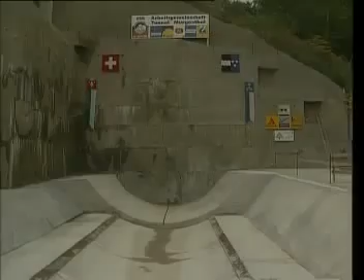A breakthrough mission always requires project-specific solutions in mechanical excavation. Herrenknecht develops, manufactures, and sells the entire range of tunneling machines.

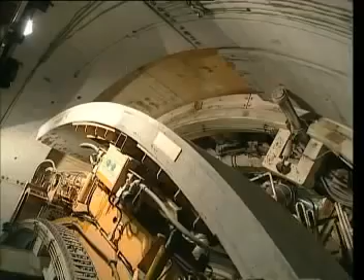The drilling equipment has proved successful under all geological conditions and on all continents of the world for tunnel diameters from 10 centimeters to over 14 meters.

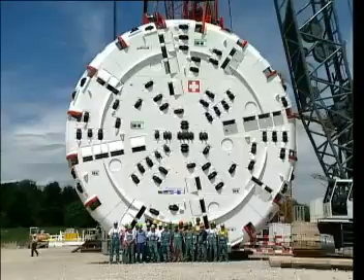Based on the specific requirements for building the Guadarrama tunnels north of Spain's capital, Madrid, Herrenknecht designed the 9.51 meter diameter double shield machines.

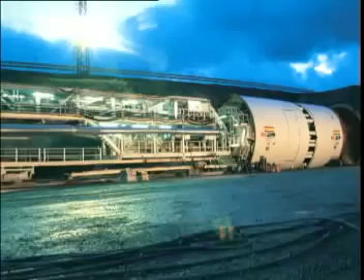They will produce an approximately 30-kilometer long tunnel for a high-speed train through the Guadarrama mountain range.

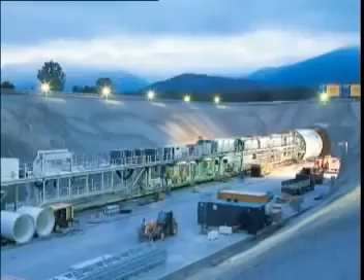The two double shield machines rank among the technically most challenging tunnel boring machines in tunneling. They can be flexibly modified to the respective geology of the tunnel line, since they combine gripper principle and segment lining in a specifically coordinated process.

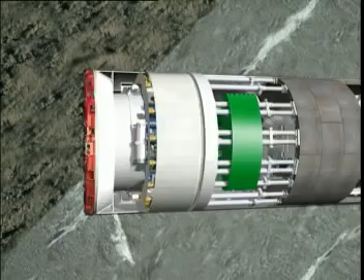Thereby, this type of machine is well suited for the excavation of long tunnels in hard rock with geological fault zones.

The tunnel boring machines, which started excavation in October 2002, enable very high and continuous tunnel production, in addition to safe work conditions.

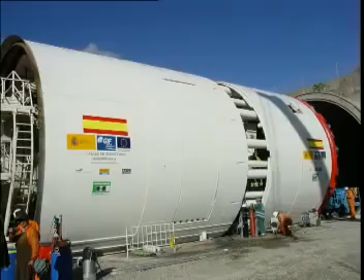Each of the 1.7 meter long tunnel sections can be excavated and lined in less than 30 minutes. In comparison, conventional machines with segment lining need twice the time.

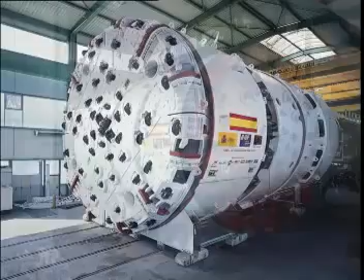Following is the machine concept of the double shield TBM in its operational sequence. The tunneling takes place in protection of a steel shield, which serves as a rock support until the tunnel lining is installed.

In the rear part of the tunnel boring machine, the so-called tail skin, reinforced concrete elements are installed. These elements are called segments. They serve as univalve and final tunnel lining. In this way, the inside of the TBM and the personnel working there are always protected from the rock.

The overall system of the double shield TBM in Guadarrama has a diameter of 9.51 meters and a length of approximately 250 meters.

The double shield machine is a mobile tunnel factory. The backup system located behind the shield keeps the factory running.

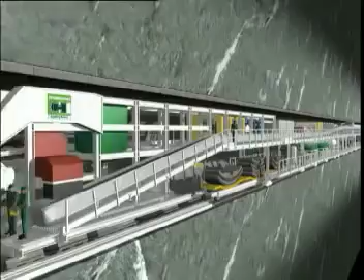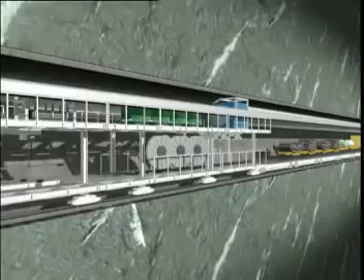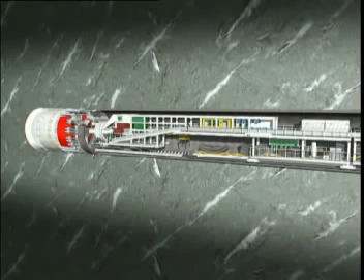The control cabin of the tunnel boring machine is installed here. In addition, the backup system secures the supply for power, water, fresh air, as well as the just-in-time supply of the segments and building materials necessary for tunnel lining. A sophisticated and seamless logistics concept in the backup system is the condition for optimal performance.

The double shield TBM owes its name to a special constructional design. In the front part of the machine is a forward-moving front shield. It permits an extension of the cutter head.

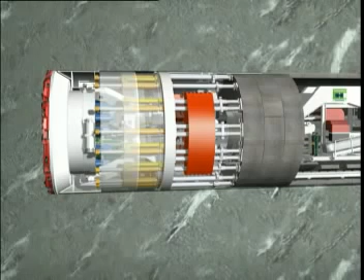The rear part of the machine is not moved during the tunneling progress. The reaction forces, torque and longitudinal forces, are transferred to the rock through the extended gripper shoes, which are located in the middle section of the machine.

Due to the separation of the forces, the segments can be installed during the excavation process, in contrast to the conventional procedure. The continuous tunneling, thus simultaneous boring and installation of the tunnel lining, ensures high performance rates.

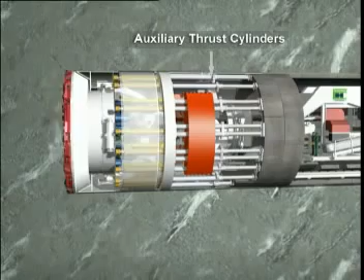Thereby, the auxiliary thrust cylinders only serve for the fixation of the segments. In fact, during the segment installation, as well as during the re-grip cycle, the rear section of the machine, including the gripper section and the tail skin, is pushed forward.

After completion of a stroke, the gripper shoes are retracted and the rear section of the machine is pushed forward against the front shield with the auxiliary thrust cylinders. The re-grip phase takes only a few minutes. Subsequently, the next section can be excavated.

The continuous excavation can only be performed in rock sections without fault zones, because the gripper shoes use the surrounding rock as counterbearing. Therefore, the telescopic front shield can only be opened in stable rock conditions.

If the double shield encounters a section with fault zones, the telescopic front shield is retracted. The entire boring machine is pushed forward only by the auxiliary thrust cylinders, which are pushing against the tunnel lining.

This kind of excavation is called discontinuous, since, as with a conventional shield, thrust with cylinders is only possible after complete installation of a segment ring.

This operating mode ensures optimum security in faulty ground. In this way, the machine can be adapted to the geological conditions and permits optimum performance at any time.

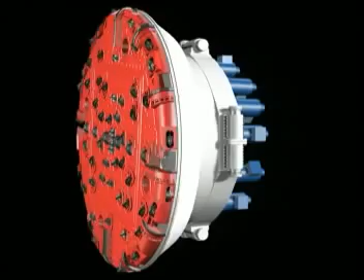The cutter head is driven over circularly arranged electric motors, which are frequency controlled. These electric motors drive the cutter head via planetary gearboxes and pinions into an external bull gear, which is part of the 3-axis roller-type main bearing. The installed drive capacity amounts to 5,500 kilowatts.

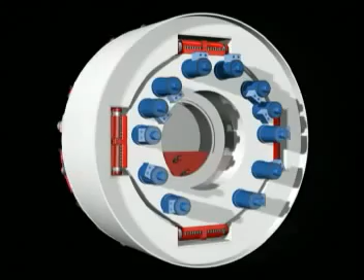The entire drive unit with attached cutter head is located above the torque box cylinders in the steel structure of the front shield. By adjusting the torque box cylinders in horizontal and vertical direction, a shift of the overcut of the cutter head is accomplished versus the shield. This overcut is necessary in order to minimize the friction between rock and shield, to counteract possible rock convergences, and to allow TBM control.

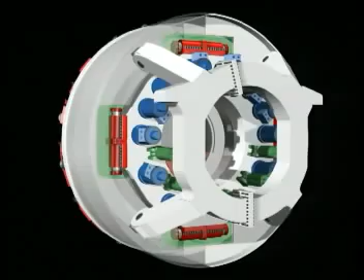Furthermore, it is possible to shift the cutter head longitudinally. This is provided by cutter head displacement cylinders, which have a stroke of 400 millimeters. They support themselves on the steel structure of the front shield. Due to the hydraulic control of the entire unit, it is ensured that the main bearing only receives a defined load.

The longitudinal shifting can also be helpful when a blocked tunnel face is encountered, for example, to free the cutter head, or for the creation of a workspace between the tunnel face and the front of the cutter head.

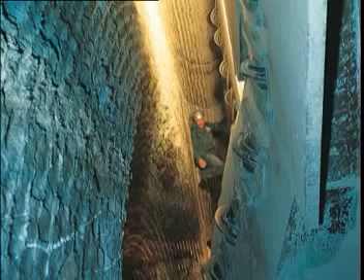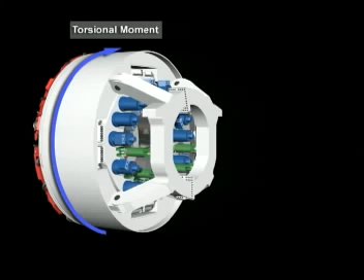Of particular importance for the double shield is the transmission of the torsional moment resulting from the excavation and the required thrust forces between front shield and gripper shield. The thrust forces working in the longitudinal direction of the tunnel are produced by the main thrust cylinders, which connect the steel structure of the front shield and the gripper shield.

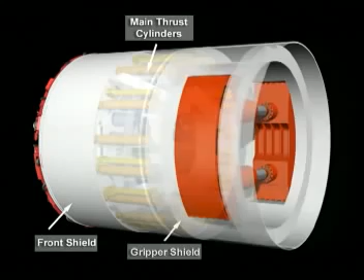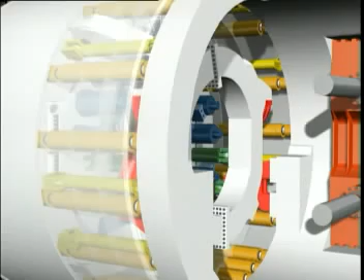The torsional moments developing from the tunneling excavation are transferred into the steel structure of the gripper shield via the torsional ring and 2 torque support cylinders. The torque support cylinders compensate thereby the relative motion between front and gripper shield.

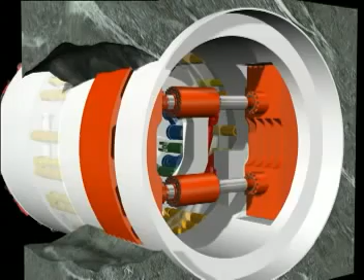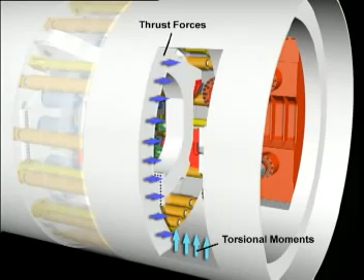The floating gripper shoes are supported in the gripper shield. 2 heavy hydraulic cylinders situated between the gripper shoes press the gripper shoes from the shield against the rock. The thrust forces and torsional moments are transferred at the contact zones between gripper shield and gripper shoes. This provides an actuated bracing of the gripper shield against the rock and the final deviation of the forces.

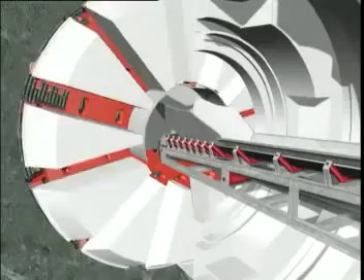The cutter head of a double shield TBM is equipped with special cutting tools for hard rock excavation. Located in the cutting wheel, 60 steel rollers with a diameter of 17 inches, so-called discs, are rolling along the tunnel face by the rotating motion of the cutter head. Each individual disc presses against the tunnel face with 27 tons.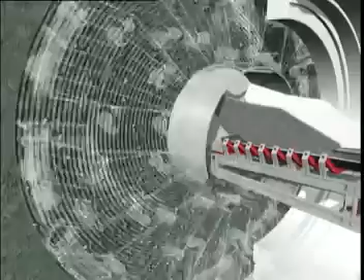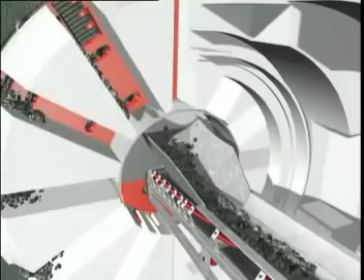The rock is crushed. The excavated material, the so-called chips, falls into the tunnel bottom. 12 buckets on the cutter head periphery pick up the muck. Via rotation of the cutter head, the muck will be lifted and transferred through the chutes into a conveyor, which is located in the center of the cutter head.

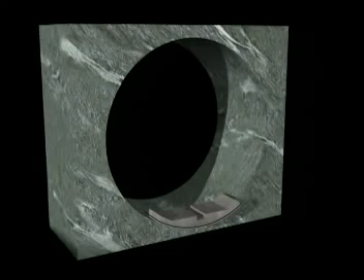The actual lining of the bored tunnel is performed in the rear area of the shield. A complete tunnel ring consists of 7 pre-finished reinforced concrete elements, so-called segments. Each segment is provided with a surrounding seal, which prevents the penetration of water into the tunnel.

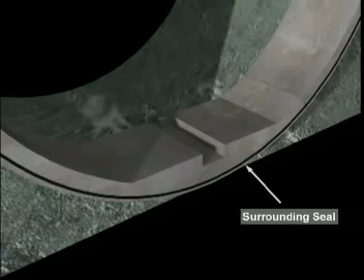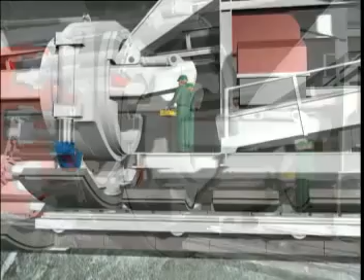Placement of the segments is done by the erector. The erector is controlled by a portable manual control and with direct visual contact. The segments are lifted off the segment feeder by a vacuum suction plate. The erector is continuously supplied with segments by the segment feeder located in the tunnel invert.

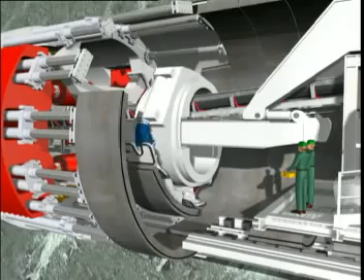At their exact intended location, the auxiliary cylinders are retracted prior to setting a new segment. The segment is set and braced immediately in place along with the overall system by the extension of the auxiliary thrust cylinder.

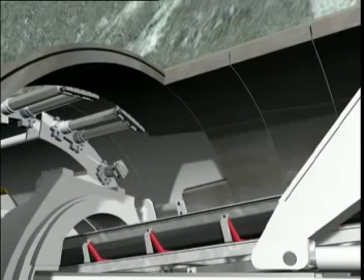The 2 top segments and the segment key have a flank inclination of 15 degrees. The segment key is not laterally set, but pushed in place from the rear, precisely fitting its location. This concludes the setting of the ring, and the tunnel grows, ring by ring.

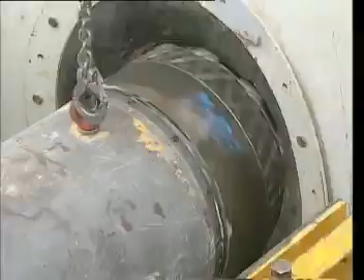Herrenknecht, the technological leader in mechanical tunneling, has the know-how and the experience to realize each tunnel project. The company, situated in southern Germany, is the only supplier worldwide who can offer and market the entire range of mechanical tunnel boring machines, from 100 millimeters to over 14 meters in diameter.

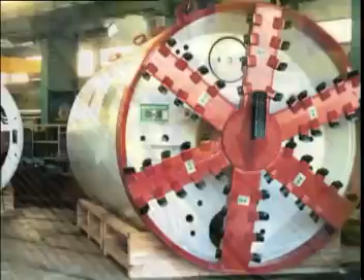Hard rock machines, EPB and partial face machines, Mixshields, as well as pipe jacking and HDD equipment made by Herrenknecht accomplished successful breakthrough missions through all geologies around the globe. 25 years of experience and a worldwide service network make Herrenknecht a competent partner.